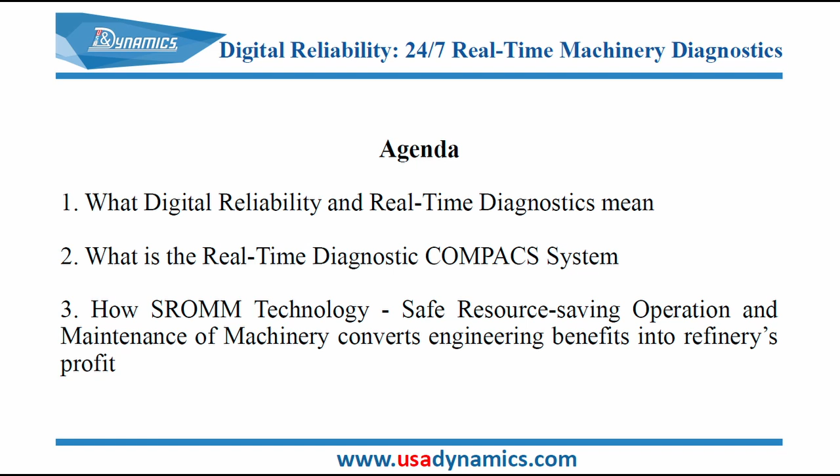So let's start the presentation. There are 3 topics that I'd like to dedicate your time to. I hope it will be useful for you. First, I'd like to introduce the definitions for digital reliability and real-time diagnostics. Then, we will explore what engineering benefits 24/7 real-time diagnostics delivers to refiners. And finally, how our solutions and SROMM technology deliver additional profit to refiners.

It's well known that the primary costs and losses in a petroleum refinery come from sudden failures of equipment. Distributed Control Systems, DCS, supply comprehensive information on the process and operation modes of the equipment. However, its health during operation escapes the attention of operators who continuously change process modes while controlling the process plant. For sustainable and reliable operation, it's necessary to provide operators with timely and unbiased information on how the operation mode affects the equipment's health before its failure.

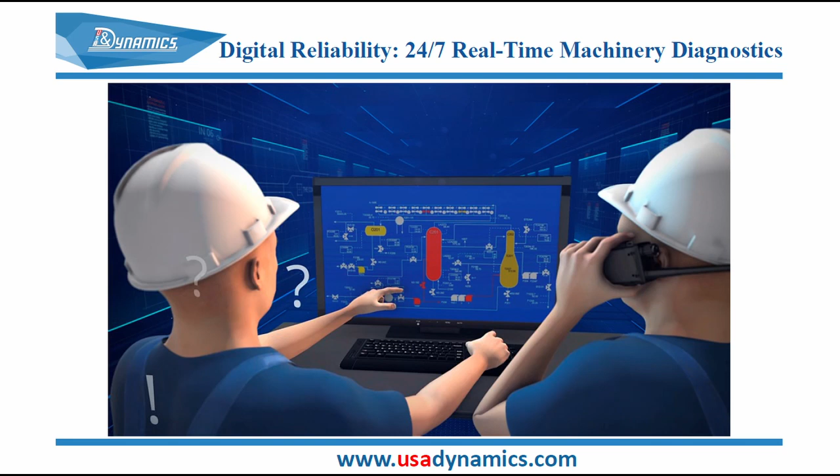It gives an opportunity not just to prevent the possible issue, but also allows people to eliminate a future issue at an emergent stage and to prevent not just failure, but even redundant maintenance and repair. Within the last 70 years, the conventional approach to keeping reliability of machinery at a certain level hasn't changed significantly.

It's based on 3 primary pillars: a safety factor, which is the ratio of a machine's structural capability to actual applied load; operational discipline of personnel, which is always striving to do the right things by the right ways; and failure recognition capability, which is an ability to predict failure before it happens.

At the beginning of the reliability era, the primary method for extending reliable uptime of machinery was increasing the safety factor. However, significant over-increasing of structural capability to actual applied load led to rising costs of machinery, which negatively impacted consumers' interests. So since the middle of the 50s last century, several approaches to providing the reliability of machines were developed and implemented, such as preventive maintenance, proactive maintenance, reliability-centered maintenance, and others.

But all of those approaches have 2 common issues: poor statistics for machinery lifespan and human error. To confine the influence of those factors on reliability, since the 70s, the main focus moved to increasing the failure recognition capability. Until now, scientists, engineers, and practitioners attempt to point out an instance of a machine's failure to be able to prevent its breakdown using different instruments and methods.

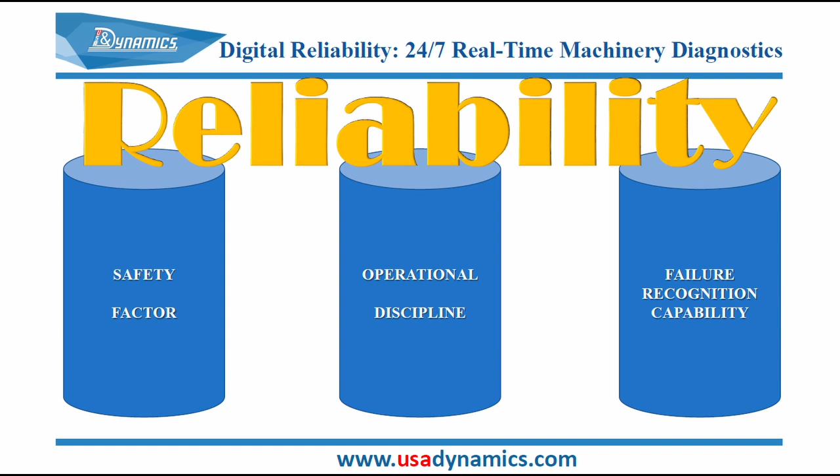Let's consider the difference between machinery diagnostics and early diagnostics. Diagnostics is a process of identification of malfunctions that consists of several steps. The very first and most crucial step is collecting data about machinery health, which contains the choices of data type, data source, data volume, frequency of data gathering, and tools to do that. Any mistake at this step severely affects the diagnosis, making it either wrong or late.

The process of diagnostics has 2 distinct errors: an error of static recognition and an error of dynamic recognition. The error of static recognition appears when a failure cannot be detected because either the wrong non-destructive testing method is utilized or the proper NDT method is used in the wrong way. The error of dynamic recognition appears when a failure cannot be detected or prevented because an interval of monitoring equates or exceeds an interval of defect evolution from emergence to failure.

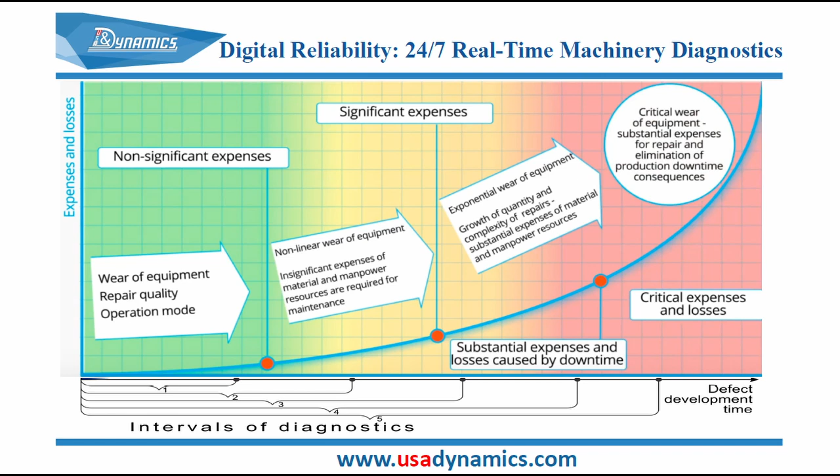The later a defect is identified, the greater the consequences and expenses are. Therefore, it's critical to identify the instant a defect begins because it's the best opportunity to intervene and prevent serious accident and possibly shutdown due to equipment failure. While diagnostics itself is a process of defect detection, early diagnostics is a process of defect preventing.

Existing solutions such as protection or condition monitoring systems are focused on confining consequences, not preventing breakdowns. DCS merely shows the failure, at best correctly starting the emergency shutdown to minimize the consequences of the equipment failure. It doesn't identify the fault at an early stage of degradation and take urgent actions to eliminate it. If the protection system alarms, the breakdown happens, or almost happens.

Even new AI software solutions work at the end of the exponential wear stage because the AI analyzes the same parameters that condition monitoring or protection systems measure. Also, almost all condition monitoring systems require an expert to interpret. Without that interpretation, the operator cannot understand what should be done to prevent an impending failure. This is the main reason why most breakdowns and accidents happen on the night or weekend shift when the expert is not on duty at the facility.

To not only prevent failure, but even repairs and maintenance, we need to identify the emergence of issues in the nonlinear wear stage, when destructive forces are just beginning to degrade the equipment. Operators need precise, proven, and timely information about what should be done to recover equipment health. With the COMPACS system, diagnosing the health of every piece of equipment in a facility in real time and delivering precise, timely prescriptions to operators 24/7, an operator doesn't need to be an expert in vibration analysis to know how and when to react. If operators identify and eliminate these destructive forces at the nonlinear wear stage, safe and reliable operation will become a reality.

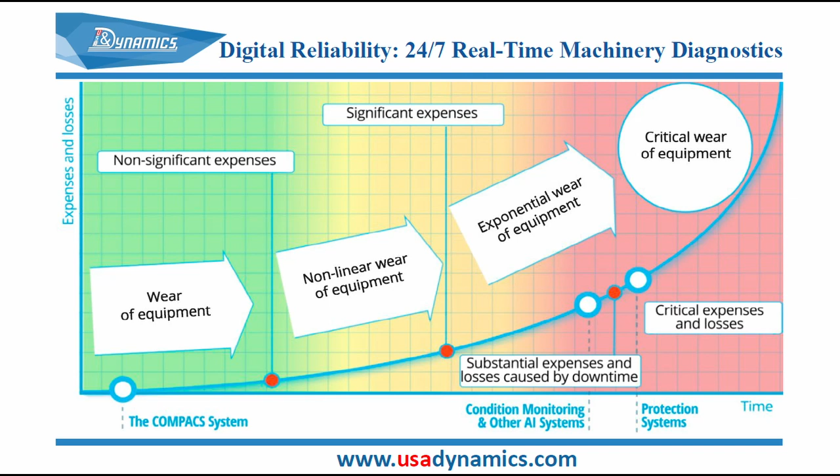It's essential that only real-time diagnostic systems, which have low errors of static and dynamic recognition of defects, and which are able to identify destructive forces influencing the emergence of defects, can shift operation reliability and maintenance efficiency tremendously towards paramount safety and uptime. The COMPACS system monitors all types of rotating equipment, including centrifugal and piston compressors, pumps, air coolers, etc. The system could be integrated with DCS, PI, and other systems over either Modbus or OPC UA interfaces.

The system monitors the health of every piece of equipment every 3 to 5 minutes, depending on the quantity of equipment at the facility. The diagnostic station is located in the control room, while the SCADA type field bus gathers proper data for physics-based artificial intelligence. Thus, artificial intelligence transforms sudden defects into gradual ones and alerts personnel by prescriptions of what actions need to be taken to prevent failure.

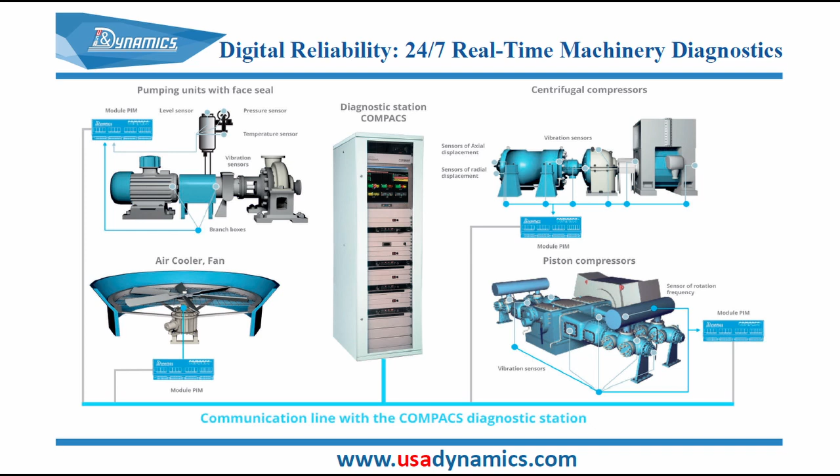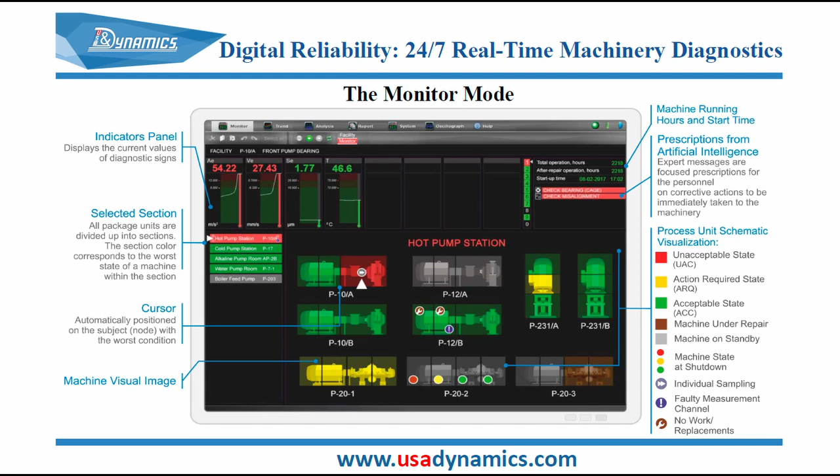Decades of scientific research are behind the components of AI. The physics-based AI is developed to recognize the wide range of defects and malfunctions in various types of equipment. The system software itself doesn't contain machine learning algorithms, but they are used widely as updates are developed.

The system has several rules of degradation which describe every defect or malfunction as a list of parameters of the vibration signal and other signals. Every parameter has its own threshold and strong correlation with a particular specific defect. So if the system identifies the parameter in a vibration signal, the defect exists and its stage of degradation is determined. So this is the main difference between statistical-based AI and the physics-based AI we offer.

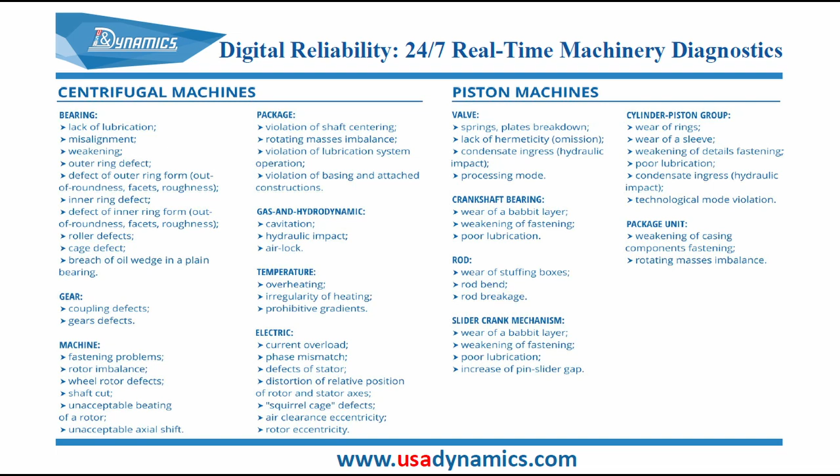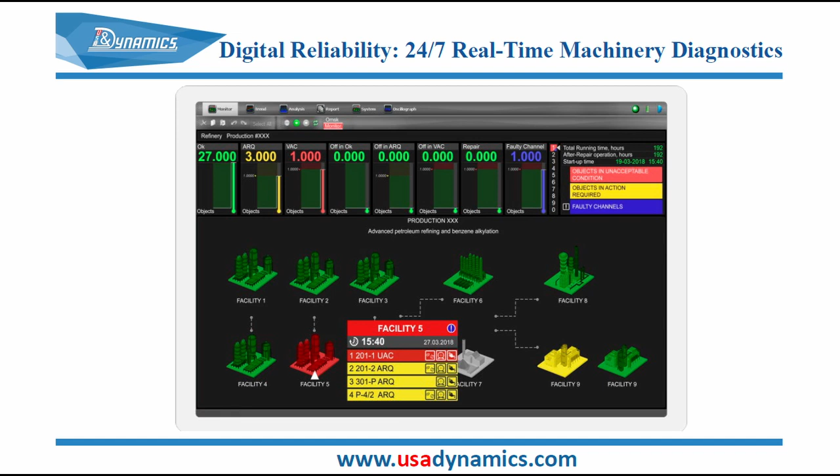The first information loop is dedicated to operators. Operators should play a crucial role in the reliability of the facility because they are at the facility 24/7. Therefore, the system identifies malfunctions of every piece of equipment in the facility and sends precise and timely prescriptions to operators. Operators are the only people, as I mentioned, who could prevent degradation in the emergent stage because they are in the facility 24/7. This is the reason why we promote the operators-driven reliability approach.

But to be able to do that, they need unbiased information, which could be provided only by artificial intelligence. Humans cannot deliver unbiased information because we are influenced by numerous external factors, such as social status, income level, etc. And this is just human nature. But in order to confine the influence on humans, we also have a third information loop for management staff. Management receives unbiased information about machinery health, about operators' involvement in the reliability process, and the quality of maintenance performed.

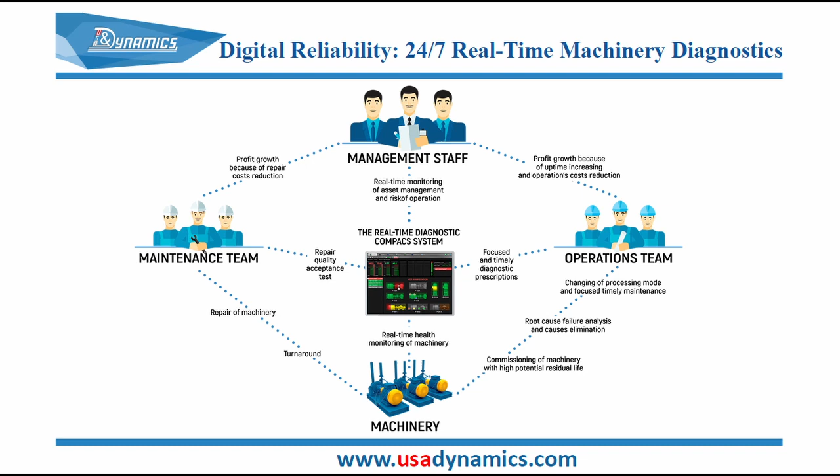The COMPACS system provides transparency for everyone involved in the reliability process. When people work together, they try to be better because they work in a transparent environment. In terms of economic efficiency, the real value which the real-time diagnostic COMPACS system and digital reliability approach brings to a petroleum refinery comes from several sources. First, it prevents accidents and shutdowns.

According to analysis of several trustworthy sources, only in 2017, the average amount of annual refinery losses due to unscheduled shutdowns was approximately $150 million. Thus, by transforming sudden defects in machinery into gradual ones, refiners could avoid most of these incidents and corresponding losses and save at least $100 million. Another source of value is extended uptime.

By decreasing turnaround outage and extending average uptime from existing 91 up to technically possible 99%, an average refinery could bring roughly $100 million of additional profit. Finally, an average US refinery spends over $9 million on the maintenance annually, which could be reduced significantly as well.

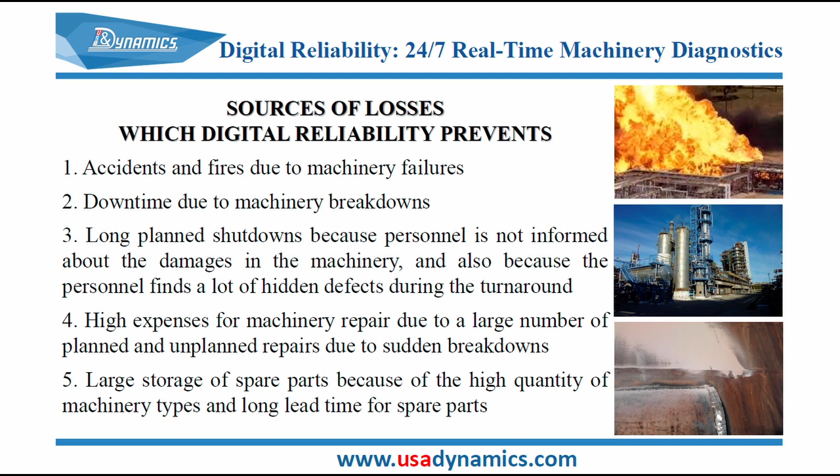By totaling all these figures, the total amount of additional profit that comes from digital reliability approach based on the COMPACS system implementation for average US refinery could reach $200 million annually. Summarizing the aforementioned information, it would be necessary to list the bullet points of digital reliability.

In order to reach desirable outcomes in safety and uptime, digital reliability requires proper infrastructure for collating useful data from trustful sources using the SCADA structure. Second, it needs to have physics-based artificial intelligence, which operates by invariance to extract information on time.

And finally, it requires a plant-wide diagnostic network for simultaneous information delivery to all levels of decision-making, from operators and engineers to managers. The COMPACS system is the only one that meets those requirements and assists refiners to make the reliability paradigm shift to implementing the technology of safe resource-saving operation and maintenance of machinery.

It brings timely and objective information about machinery health, operators' involvement in reliability, and maintenance quality. Moreover, it provides financial benefits which exceed investments in this solution by at least 10 times, provides confident safety of process operations, and generates prosperity for all who are involved and surrounders.

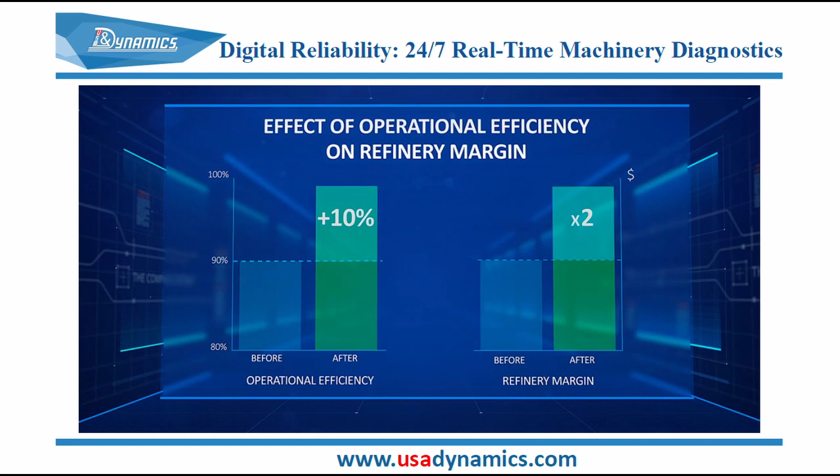Last part of my presentation, I'd like to demonstrate how you could use digital reliability to approach paramount safety and uptime. And in order to do that, you need to go through 3 steps. First is improving existing reliability. So as you can see here, after the COMPACS system has been installed, management, operators, and maintenance teams get on the same page. All see the same unbiased picture of real-time health of equipment.

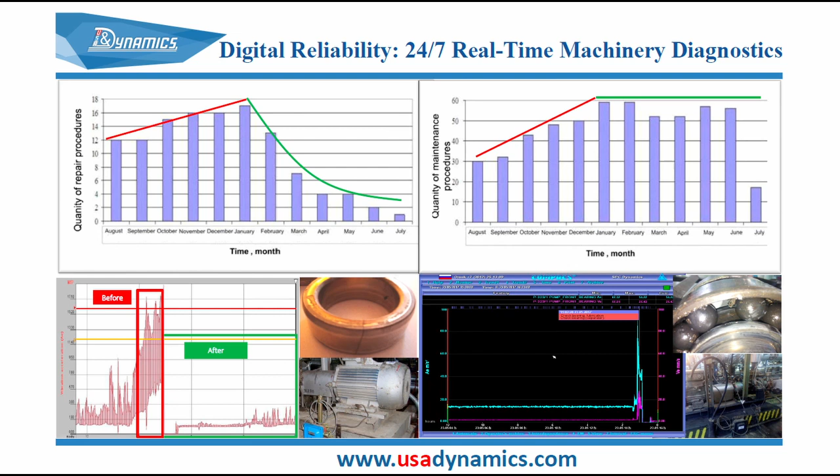These are examples of how operators can improve reliability using their own skills and their own instruments, such as operation mode, process mode, a little correction, or ordering the maintenance activities. But it was just the first step. Second step is eliminating the root causes of failures.

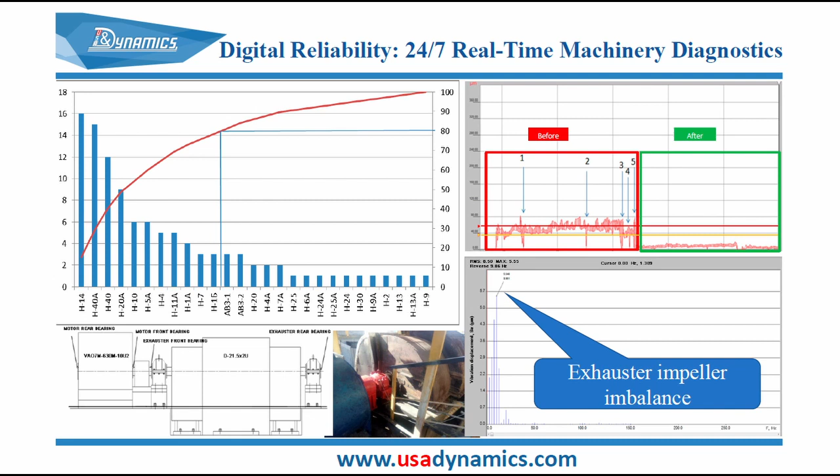Eliminating the root cause not only reduced the risk of unscheduled and unpredictable failures at the facility in the future, but also confirmed an upgrade to the existing maintenance procedures to include dynamic balancing into the map of the procedure. The third step toward safety and reliability paramount is eliminating bottlenecks.

So maybe it's the most expensive step, but we need to do that because when the facility was designed and constructed, there was little concern with using the best engineering solution. Most engineering companies use technical solutions that are just good enough to get the facility running. Construction companies use the cheapest acceptable materials and contractors, and owners also don't want to overpay for the best solutions.